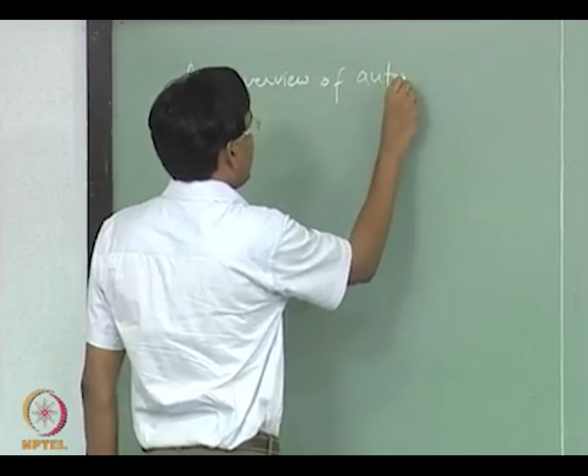In this class, we will talk about or give you an overview of automatic flight control systems. They are of three different categories.

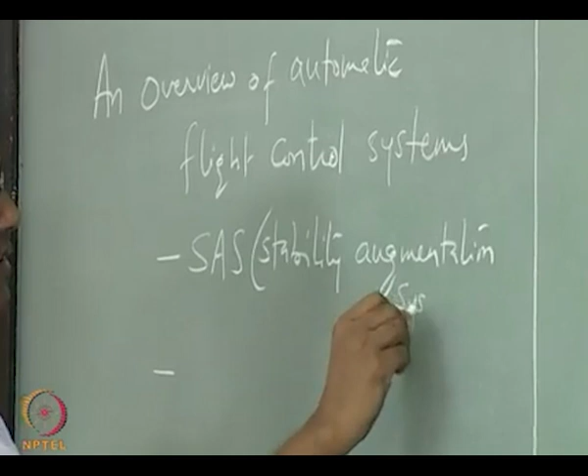One is called stability augmentation systems. So, in case your aircraft does not possess the required stability characteristic as per the requirement of flying and handling qualities, then you have to artificially augment the stability of the aircraft using a stability augmentation system.

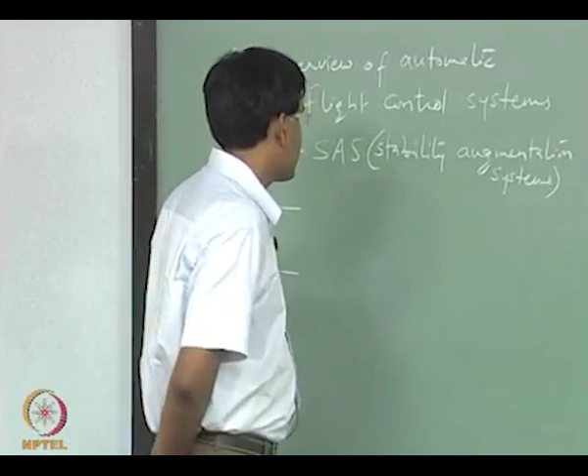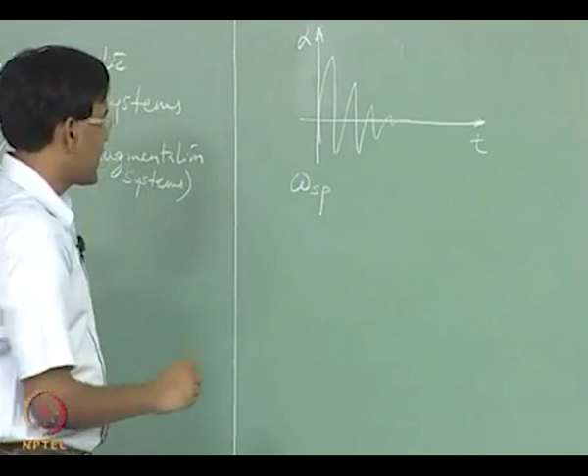So, what you are trying to do here is use a feedback control mechanism, wherein the objective is to change the dynamic characteristics of the aircraft. For example, let us say your short period response in angle of attack looks something like this. Now, from here we can read what is the frequency of the response and the damping.

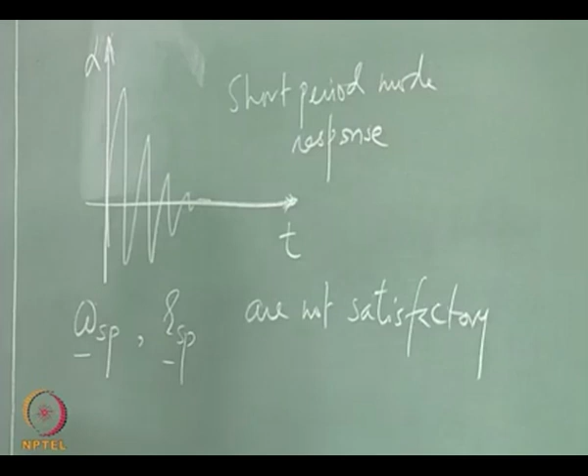And these are natural response, so the aircraft without control systems, bare design results in giving us these numbers. Let us say these numbers are not satisfactory. In such a case, we can use these stability augmentation systems to change the frequency and the damping characteristics of the aircraft using a feedback mechanism.

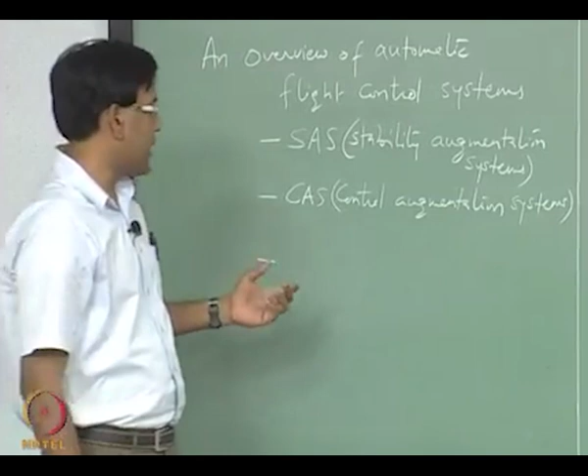The other type is called control augmentation system. So, in case you are still not able to - this is because stability augmentation system is only to change the dynamic response of the aircraft.

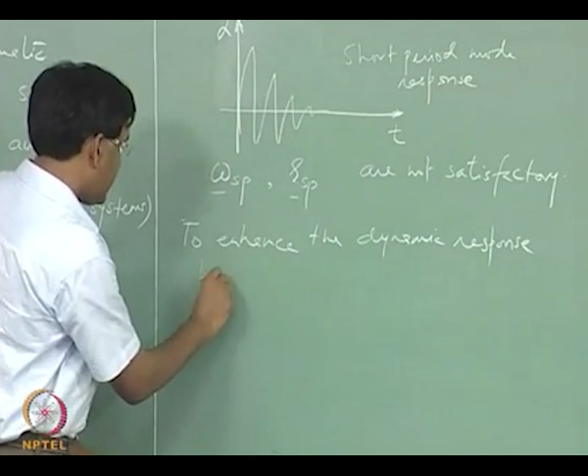Here, control augmentation system is basically to either enhance the dynamic response beyond what is possible by using stability augmentation systems, or you could have some control objectives that need to be satisfied, and there you want to design a control system which can meet the objectives.

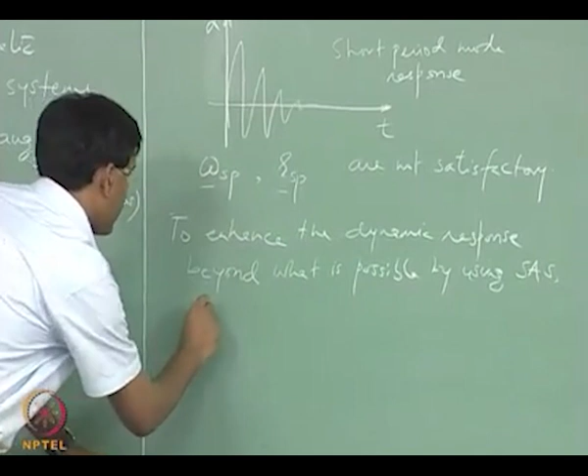Some other control objectives.

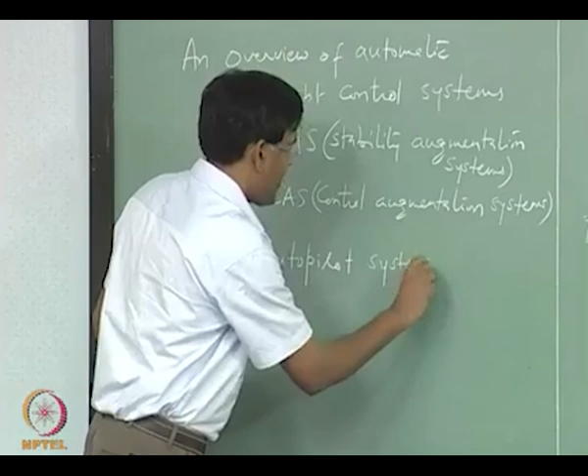The third one, which we will talk about in more detail, is autopilot systems. Autopilot systems are mainly used to keep the aircraft on a prescribed path or attitude.

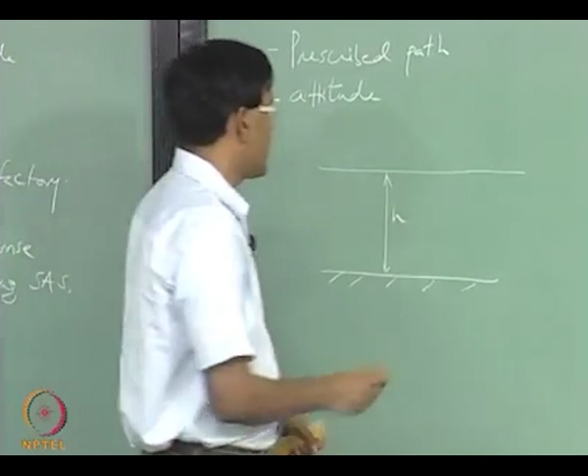So, what we want to do here is design a control system such that, for example, this height is maintained constant throughout in flight, in cruise.

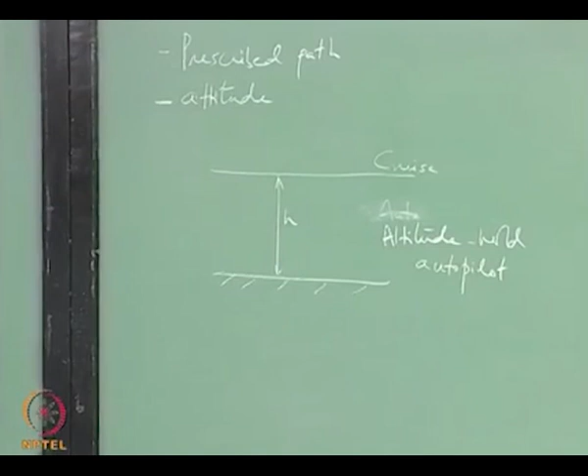So here the autopilot engaged with this constant altitude condition is called altitude hold autopilot. The idea is to design control systems which will meet these objectives, but not really bothering about how the dynamic response is looking like. Of course, the control systems engaged to maintain the altitude should not result in an unwanted transient response, so these autopilots also include some features which will try to control the dynamic response.

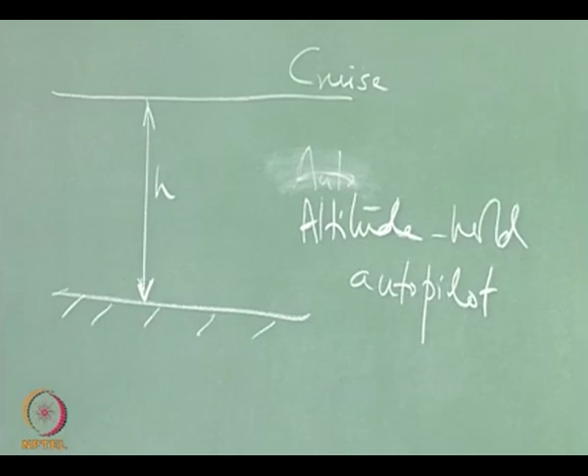So, let us look at some of the autopilots that are normally seen on an aircraft.

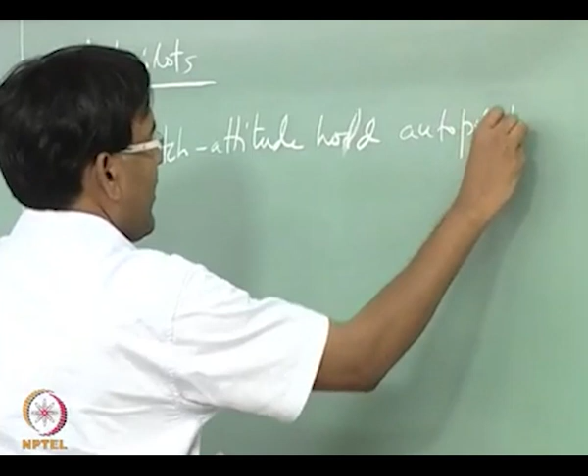Pitch attitude hold autopilot. Altitude hold autopilot. Mach hold autopilot. Roll attitude autopilot. These are some of the autopilots that an aircraft has on board.

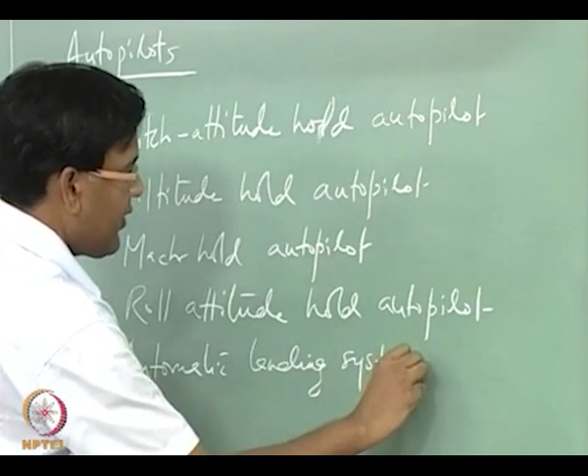And automatic landing systems. So, what we are trying to do here is give some comfort to the pilot.

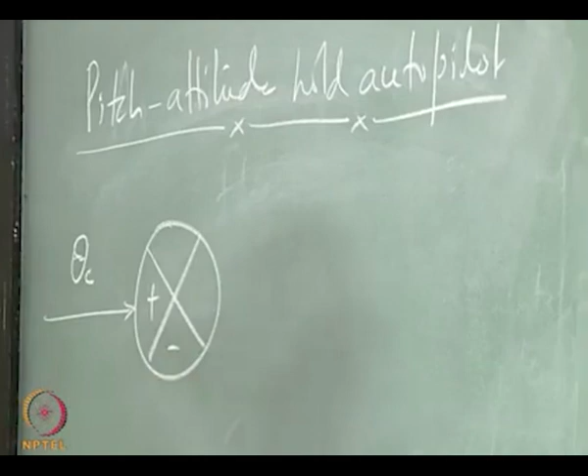The idea can be represented using this schematic, which is also called a block diagram. So, this is about controlling the pitch angle, theta is the pitch angle here. This is a reference theta at which we want to keep the aircraft at all times, even in the presence of disturbance.

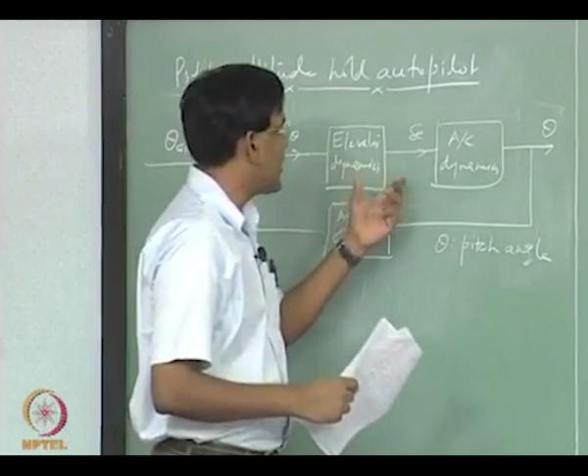So, what is happening here is, as soon as there is a change in pitch angle from this reference condition, the attitude gyro which is fixed at this condition will be reading an error in change in pitch angle, and that error is going to actuate the elevator in such a fashion that this theta reference minus theta is minimized. So, this theta is being read using this attitude gyro and is being fed here, comparing theta with this theta reference, and if it is not zero, then there is an error which is being introduced here. Proportional to that error, this elevator is being deflected, and that in turn is giving theta, which will try to minimize this error in pitch angle.

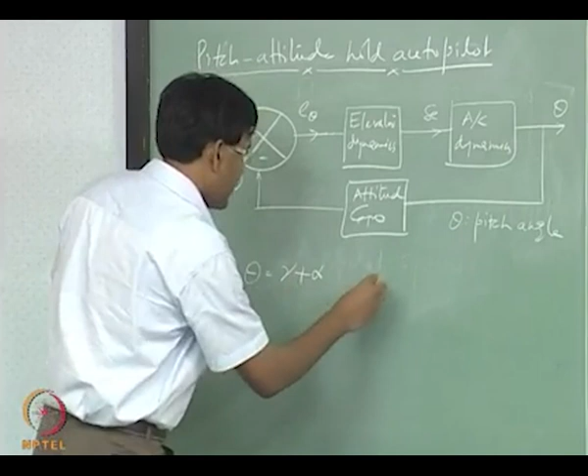So pitch angle, when we talk about controlling it, we are actually not controlling the flight path angle or the angle of attack independently. Here gamma is flight path angle and alpha is angle of attack.

So, let us say we are flying a level condition. This autopilot is engaged in a wing level condition. So, if we look at the equation of motion of equilibrium, lift is equal to weight.

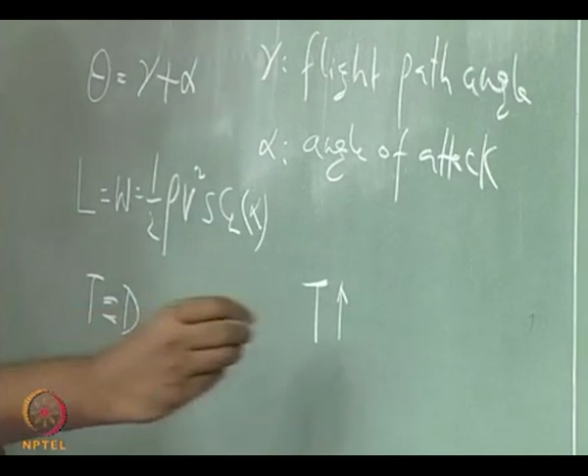So, whenever there is a change in throttle, that changes the velocity, and if this change is to increase throttle somehow, then the alpha goes down to balance this equilibrium, and when alpha goes down, gamma has to go up. So, because we are trying to maintain the pitch at the reference condition, such a thing can happen.

Even when we are flying a climb flight, it may so happen that finally, if we are just using this controller autopilot, the aircraft may just level out. So, this is not a very popular autopilot, but is used within another autopilot, for example, this altitude hold autopilot. The other disadvantage of this is that if we just look at this kind of feedback mechanism, it is not really controlling the dynamic response. So, now a better pitch attitude hold autopilot will look like this.

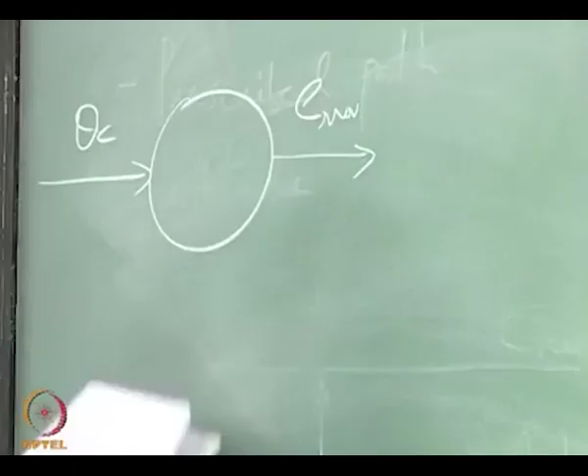So this is a compensator. This is what we are talking about. The compensator is used for augmenting the control power of the aircraft. It's almost acting like a control augmentation system.

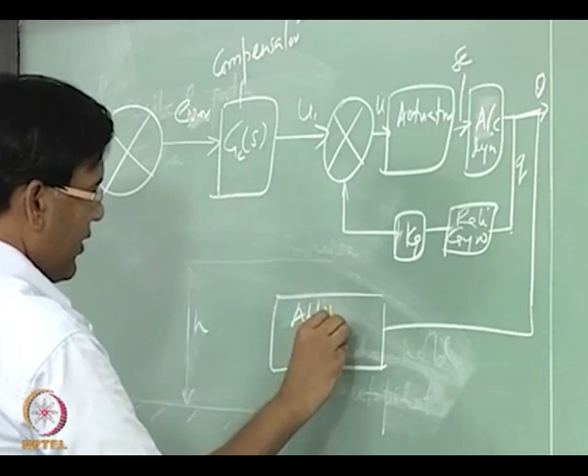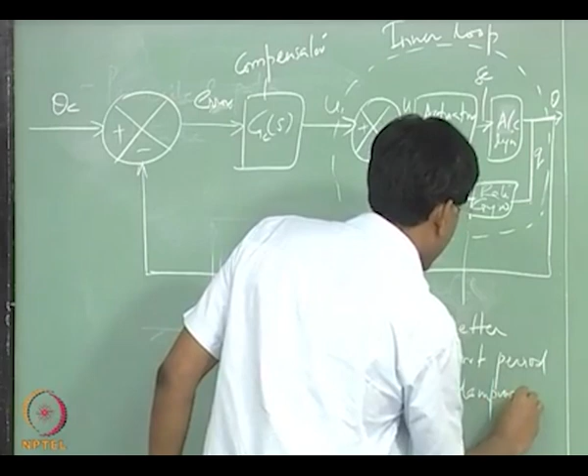So, there is an inner loop which tries to change the dynamic response, or damping, in such an autopilot. This kind of arrangement not only meets the criteria of keeping the pitch angle constant, but also tries to change the dynamic response using this inner loop. So, this is the inner loop which is using the pitch rate feedback through this rate gyro, and this results in a better short period damping.

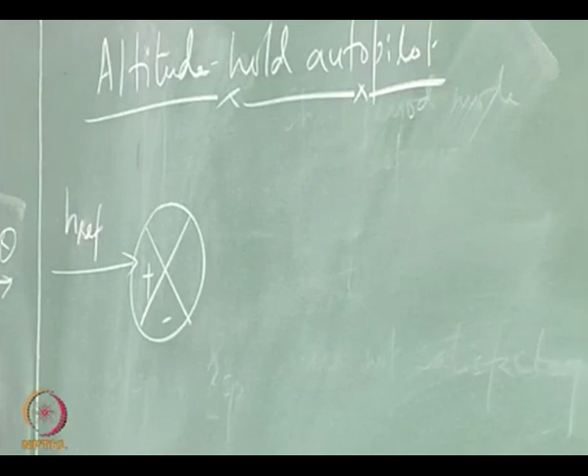Clearly, as the name suggests, the main function of this autopilot, the altitude hold autopilot, is to maintain an altitude, a prescribed altitude, which is called H reference here. The idea is the same. So you have to read the actual altitude, compare it with the reference altitude, and proportional to the error that is introduced in the altitude, deflect controls so that you can reduce this error.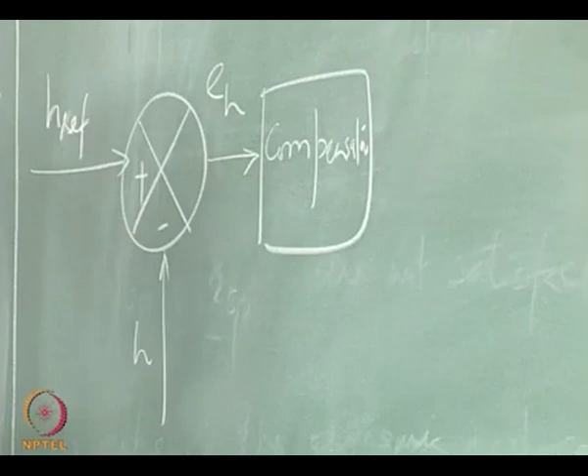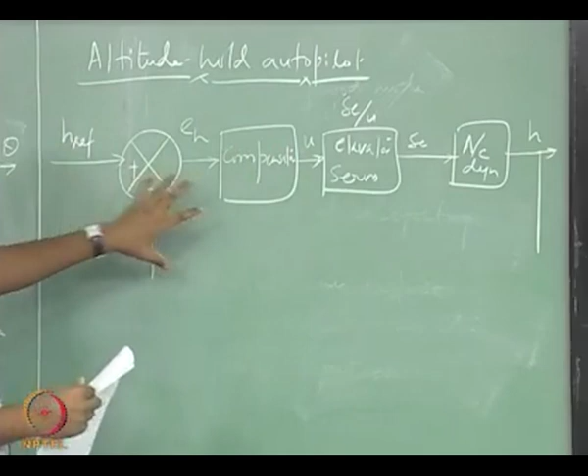So, typical elements of the altitude hold autopilot control systems are these. Now, this delta E is a modified delta E which is going into the aircraft dynamic equations, and that is outputting this H. As soon as this H becomes H reference, this control system may stop functioning.

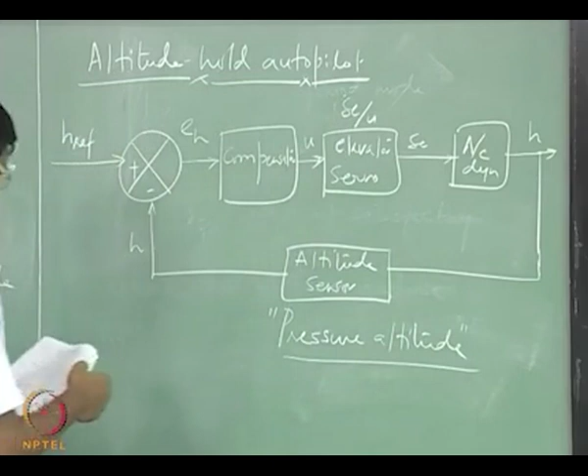The altitude sensor is based on the pressure reading. So, the altitude that we are measuring here is the pressure altitude. An altitude hold autopilot actually holds the aircraft within 200 feet of the H, which is the reference H reference altitude. So, it keeps the aircraft within this plus minus 200 feet.

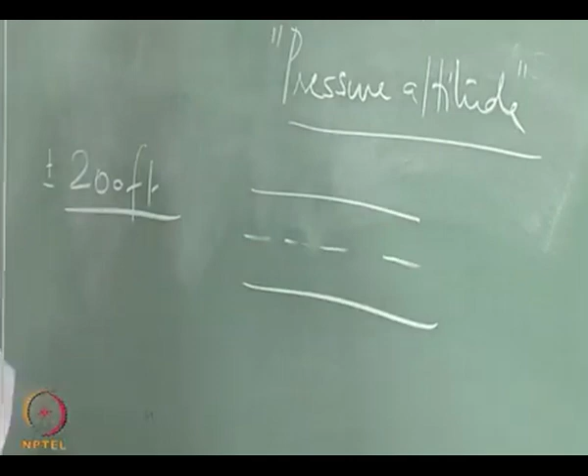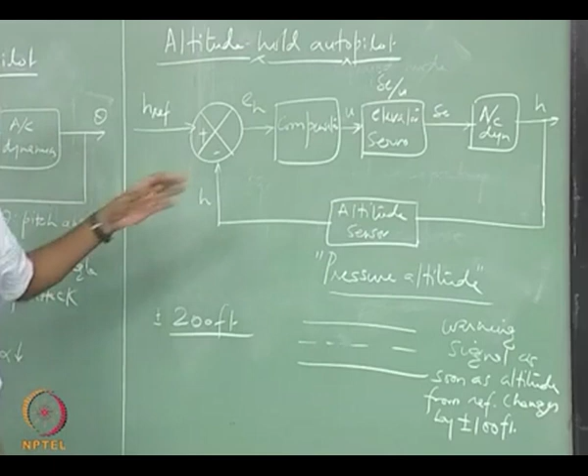And actually it starts signaling, giving a warning signal, as soon as the altitude changes from reference by plus minus 100 feet. So, we can clearly see that 200 feet is actually not a small number, but a typical altitude hold autopilot can be engaged to give this kind of performance.

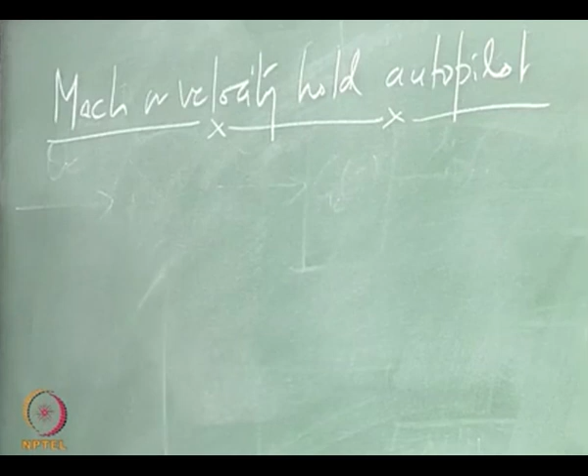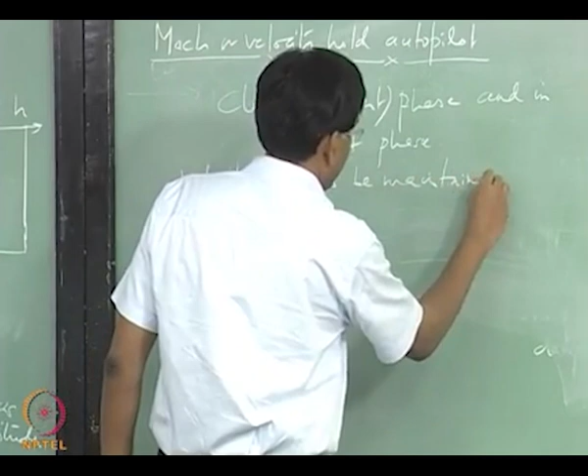The main function of the Mach or velocity hold autopilot is to keep the velocity or Mach at a constant value in the climb or ascent phase. And so, velocity has to be maintained constant at the prescribed value.

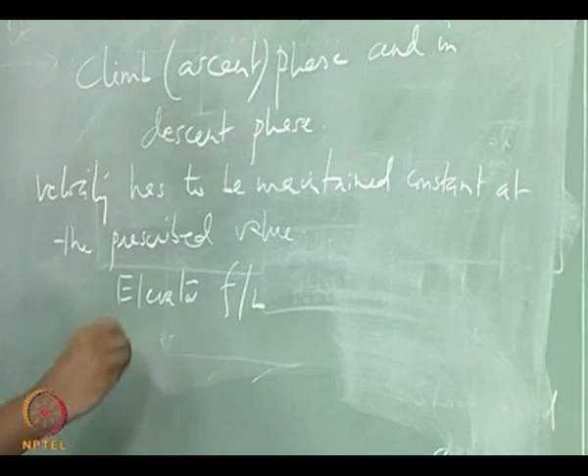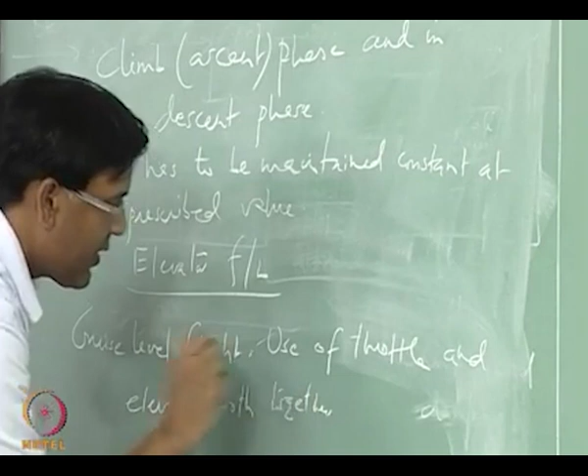This again uses an elevator feedback. So, we feed the variable which is Mach number here, or the velocity, to the elevator, and the elevator has to act appropriately to keep the velocity constant. But if we are flying a cruise level flight, in order to maintain speed in this particular flight, we also need to use throttle. So, use of throttle and elevator both together is mandatory.

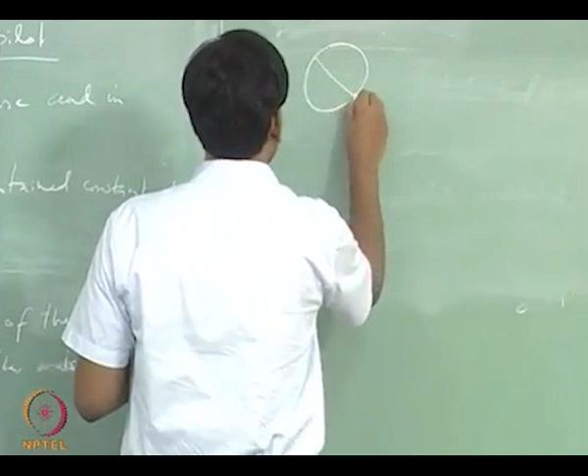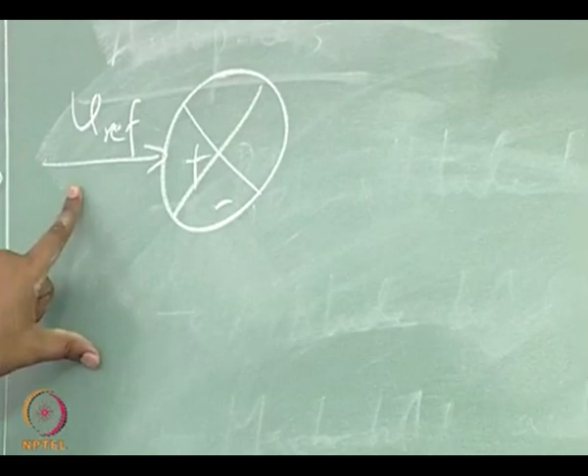Let us look at the block diagram of a Mach hold autopilot. So, it is similar to what we have drawn earlier. You have to remember that each of these autopilots are for specific purposes. So, if we are trying to hold the velocity here, it can only hold velocity and it is not going to do anything else. So, if you want to do something else also, for example, controlling the dynamic response, then we can have something within the loop of this control system. So, the main outer loop will try to control the Mach number or the speed, and the inner loop can be used to change the dynamic response.

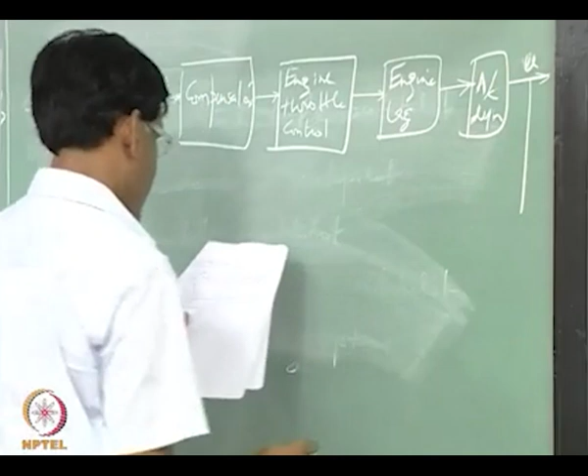This one here is using the throttle to keep the velocity constant. A feedback element can be, for example, a sensor which can read the actual speed.

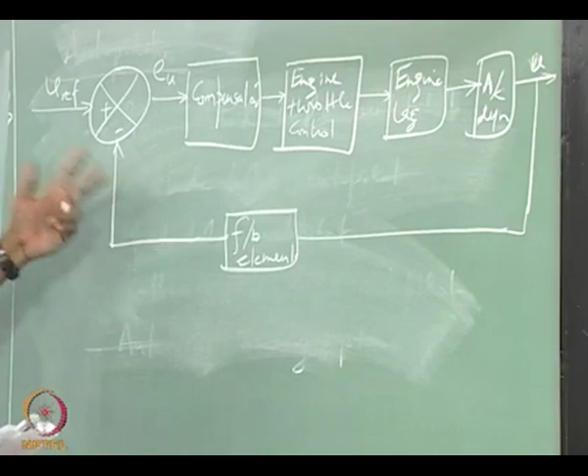So, in general, the basic feature of any control system using feedback will look something like this.

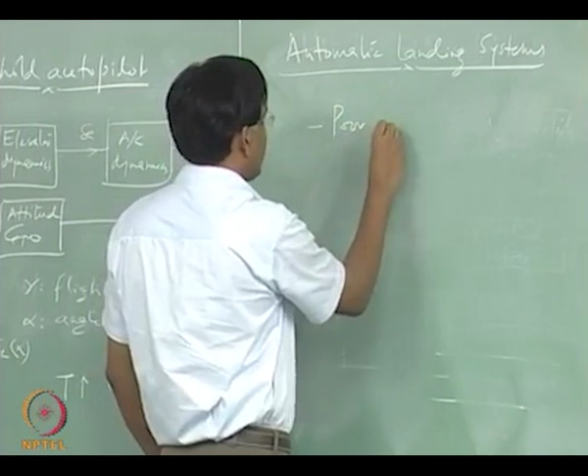Automatic landing systems. Landing is usually a difficult maneuver because many times the visibility near the ground may be poor, or the weather condition can be poor or bad.

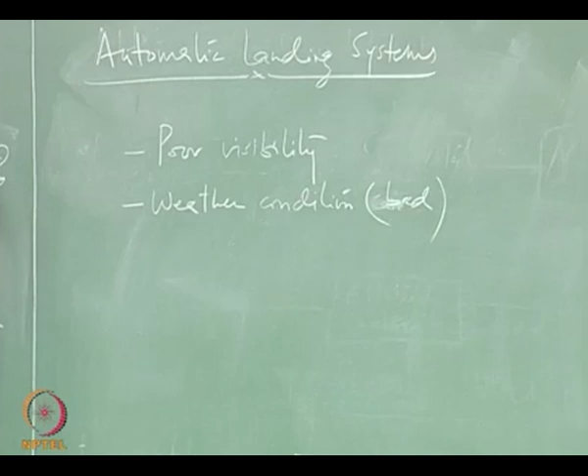What may just happen is when an aircraft is approaching the runway or it's about to go on to a landing approach, it may just find itself slightly disoriented from the center line of the runway, and there could be presence of wind also which can move it laterally. So the aircraft, if it is not having an autopilot kind of landing system, in such a case...

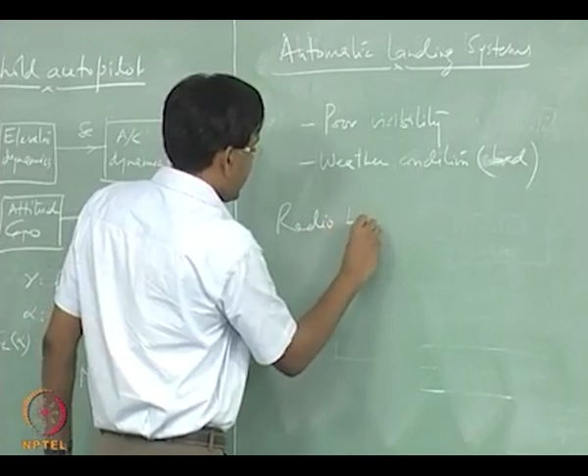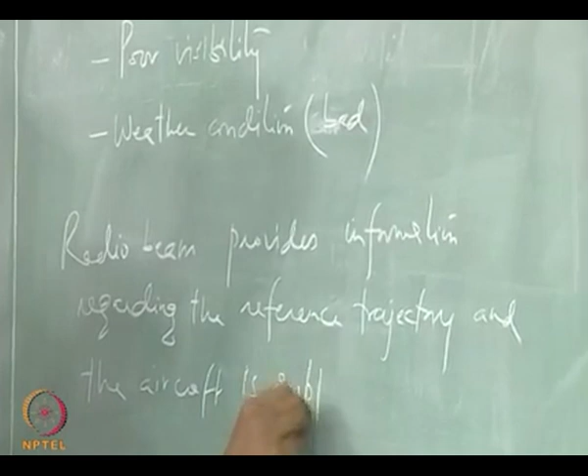The aircraft is guided by a beam. This beam is a radio beam, which provides information regarding the reference trajectory, and the aircraft is supposed to follow the beam.

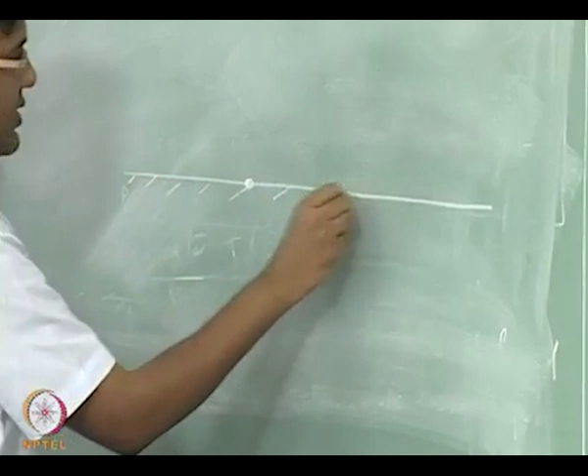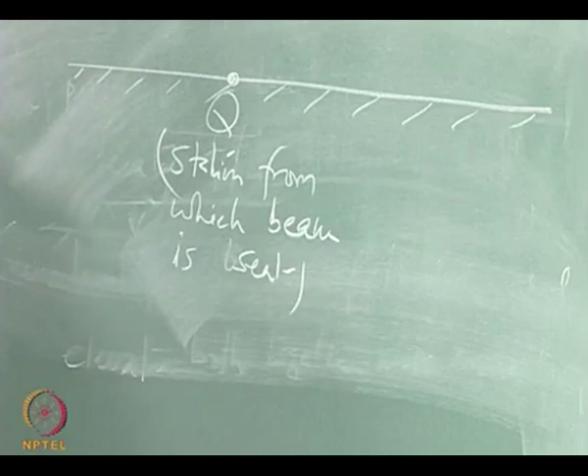So an aircraft which may be following, let us say, this glide path, this is called. So let us say this aircraft is following this path, not really a glide path, and it is supposed to follow...

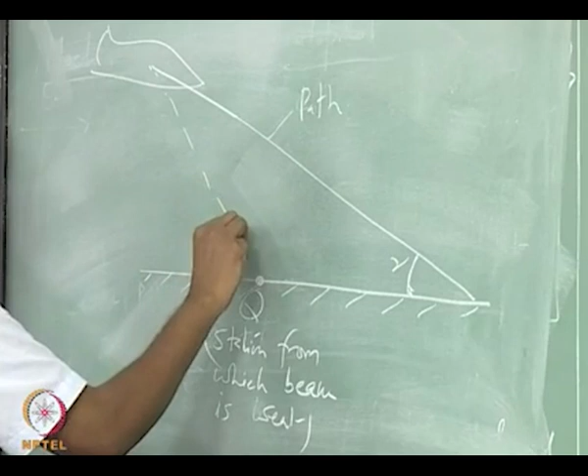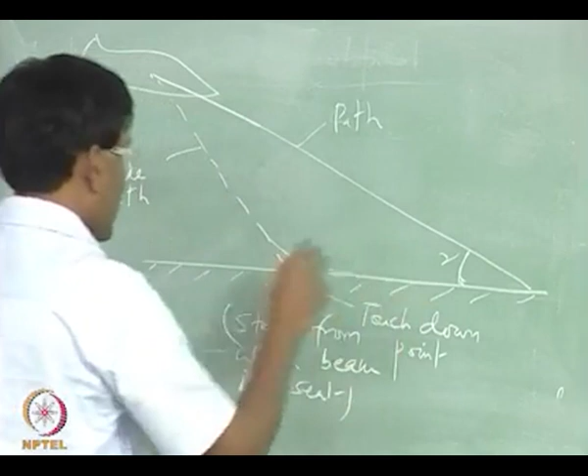This beam. So this is actually the glide path, and this station is at the touchdown point, after which the aircraft has to flare out and then move on the landing, move on the runway for some distance before it stops. So this is called flaring.

So an automatic landing system will consist of guiding the aircraft to this glide path and to flare when it is coming closer to the touchdown point, so that it can land safely. So this angle is the reference flight path angle, gamma is the flight path angle.

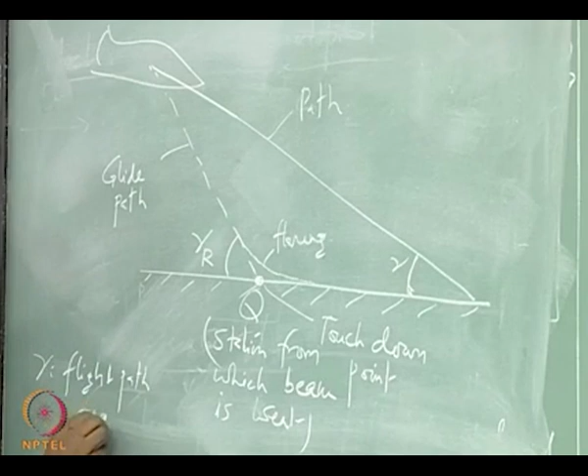So let us say this is the point where the aircraft is at any time t1, and afterwards, after time t2, it has moved to this point, but it is supposed to touch down here.

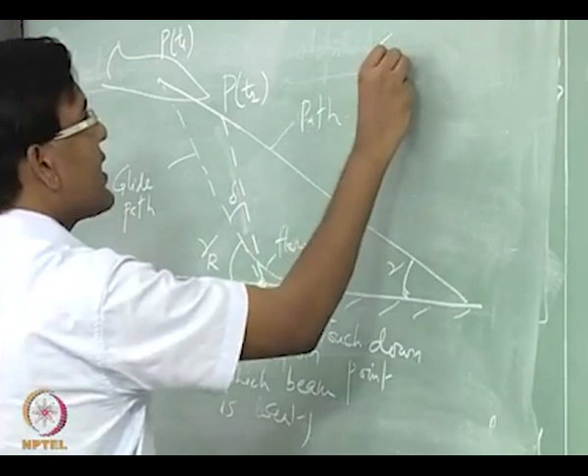So the amount by which it is deviating from its required glide path can be denoted by these angles. So this delta is the deviation angle, R is the distance which is called range, and this is the lateral deviation.

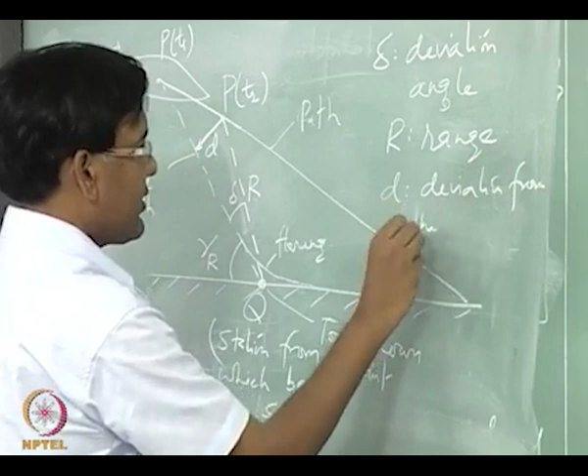So this d is the deviation from the glide path. An aircraft is having some velocity Va on approach.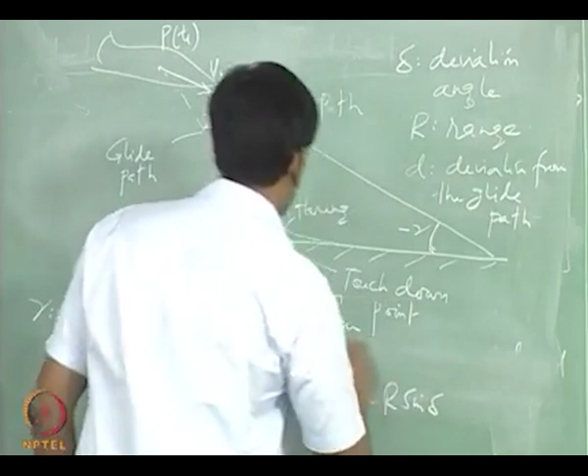So clearly both these angles are negative because I am trying to land the aircraft. So glide path deviation, this d, is given by r into sin delta. This angle is usually small, so even though the picture is looking big here, this angle is small, so that this d is r into delta.

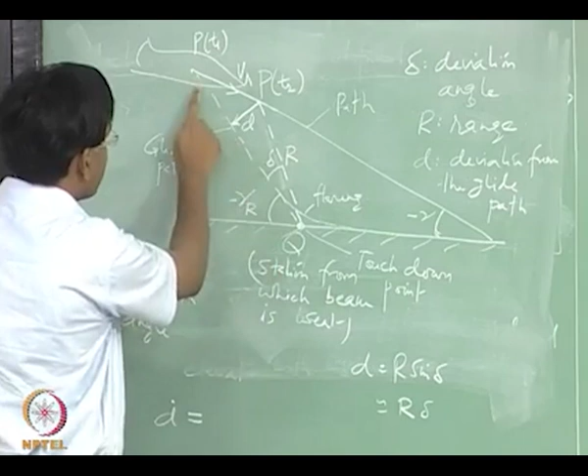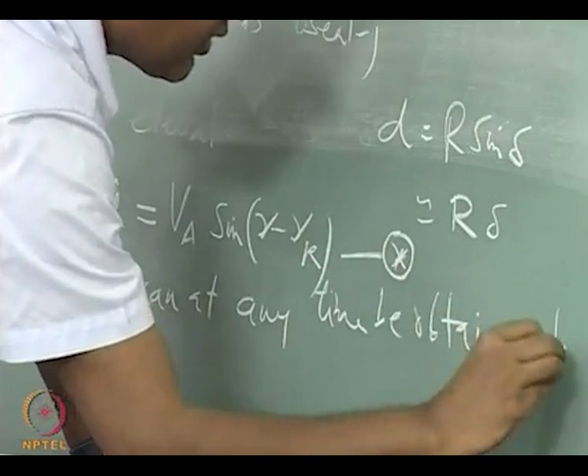Okay, so with this background, let us look at how actually an automatic landing system looks like. So here we are again looking at the autopilot for automatic landing.

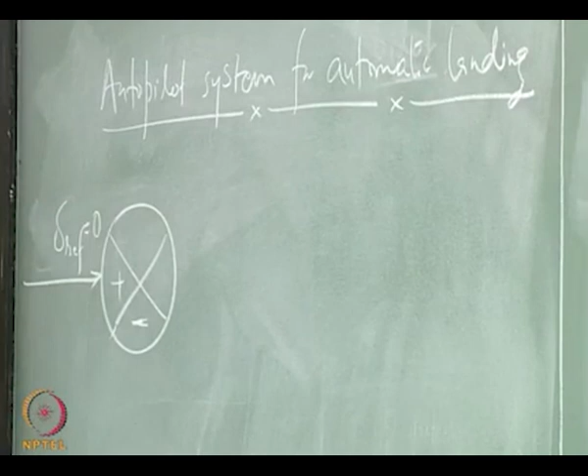The reference variable here is the deviation angle, which has to be 0. Error in delta, the deviation angle, is fed to what is called the glide path coupler, which is trying to change the attitude of the aircraft, so that it is following the glide path.

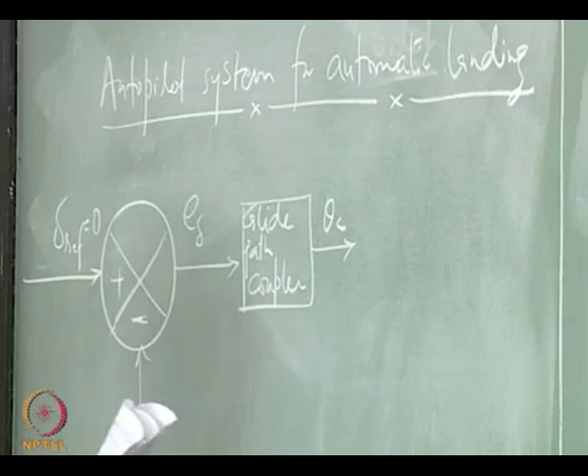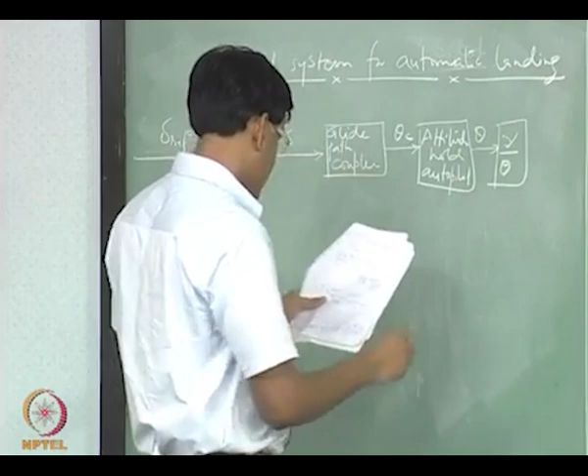And here an attitude hold autopilot is engaged because theta can be maintained at the prescribed value. This will change the flight path angle according to this dynamics. This gives gamma.

Va into gamma is actually resulting in the—so if you look at the altitude, rate of change of altitude is Va sin gamma. So this rate of change is also called rate of climb or rate of descent.

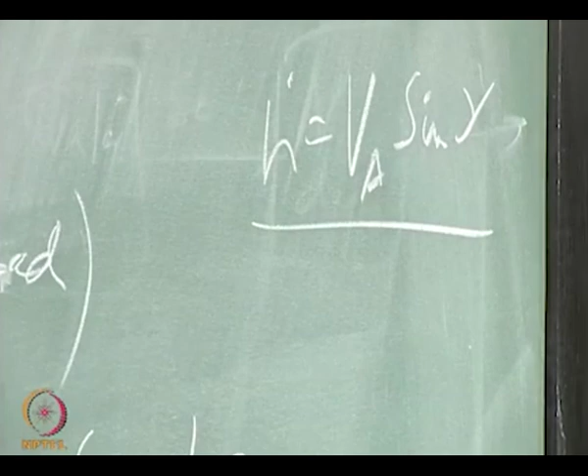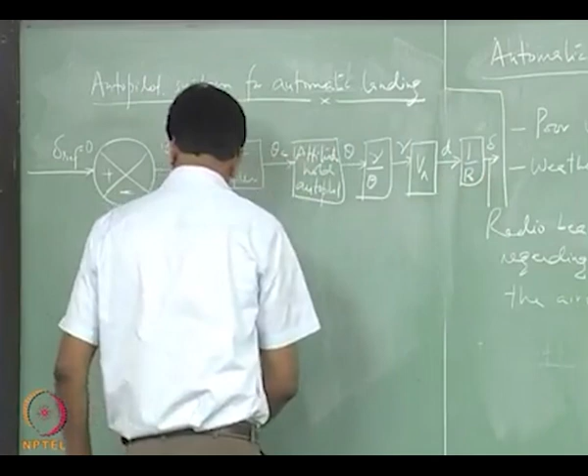And this gives this deviation from the glide path, which multiplied by 1 over r gives delta, the actual delta. And this will be fed back to compare it with the reference condition.

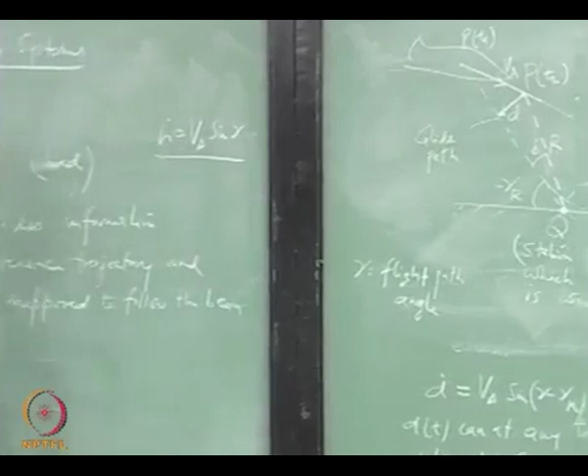So the objective of this is to control this deviation angle. The flare control has another control block in place along with it, so that when the aircraft is coming closer to this point, the touchdown point, it has to flare out and roll out. So there is a separate control system which gives automatic flare.

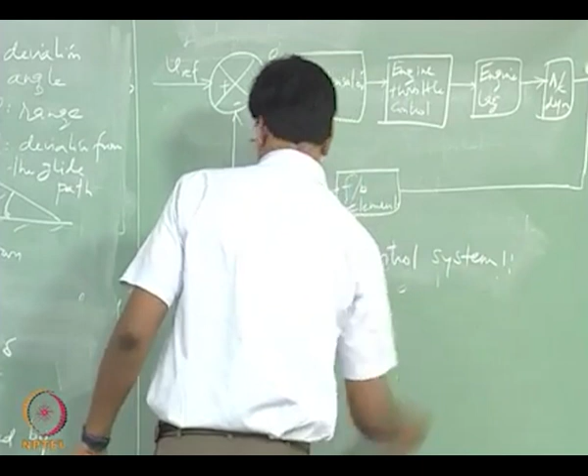So with this, we conclude our lectures on flight dynamics.